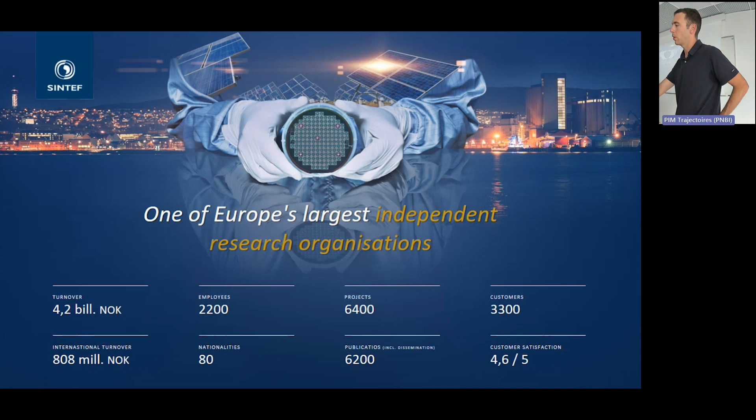The kind of very distinct aspect of SINTEF is that we work very closely both with university and with industry, in particular with NTNU, who was introduced by Erin just before us. SINTEF was actually created as a kind of spin-off or valorization company from NTNU.

Most of our employees are researchers, and most of them again have a PhD. Then we have some management and also a lot of technical personnel, because we operate quite a large amount of laboratories in very different fields - technical personnel and engineers.

Interestingly, though we're a private company, we have to really win our projects on the open market. It's not very much that we get as funding from the state every year - it's about 8%, which varies from year to year according to how much we publish, how many employees we have, and so on. So basically it's a lot of competition, both at the national level and international level, towards research projects like EU projects, national research projects, and also commercial project consulting.

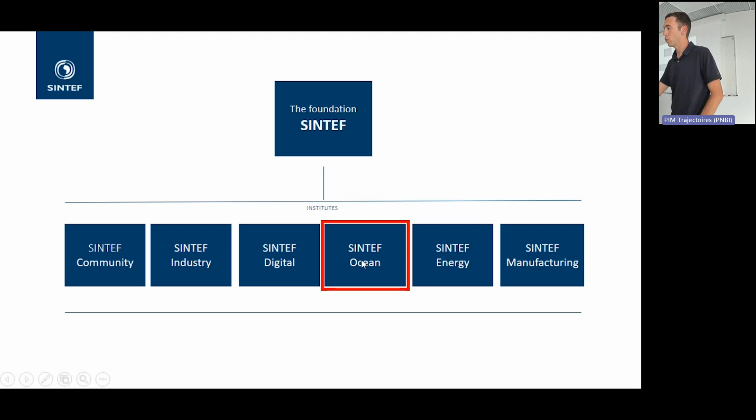I'm working for SINTEF Ocean, which can be broken into different departments. It results from the fusion about 10 years ago of different institutes in SINTEF.

What was a bit new at that time was that we merged the heavily technological part, where we looked at marine structures, hydrodynamics, and so on, with the biology world - aquaculture, fisheries, climate, environment, modeling of environment - things which are quite close to what FEM is doing actually. And we serve different markets connected to these topics.

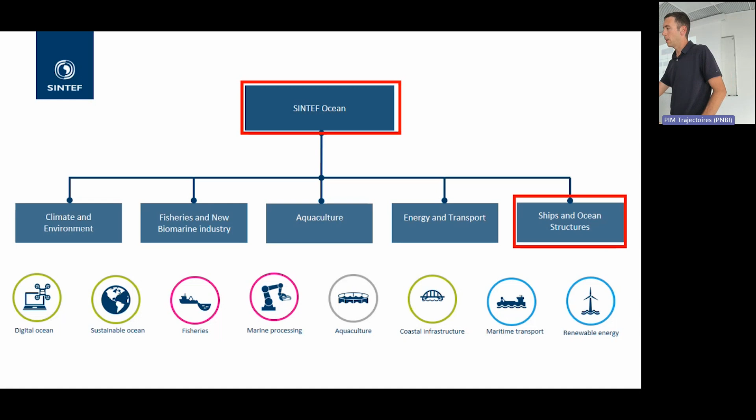I'm working in the ship and ocean structures department, and what we are proud about is that we operate laboratories which are among the biggest in the world in this class. We have software development, and we also do measurement of full scale on ships and so on. We also do services and studies for the industry, so we are very connected in many ways to the problems we are addressing.

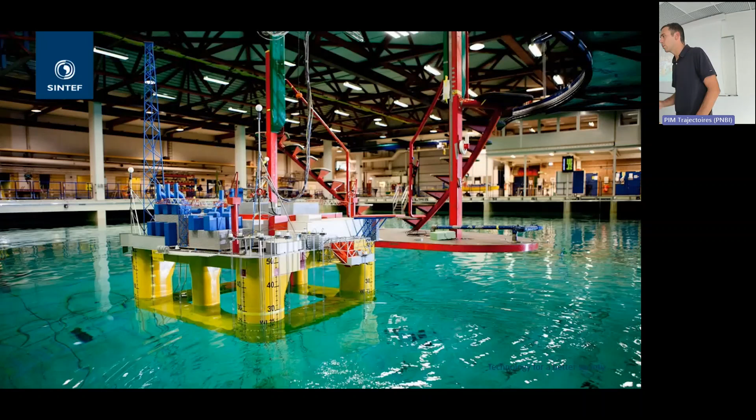The biggest lab we have as of today is the ocean basin. Some of you may have visited it - it's a basin which is 80 meters by 50 meters. It's quite large, and it can go from basically 0 to 10 meters water depth. You can generate waves from different directions, current, and so on.

This was built in about 1980 to serve the shipping market, to be able to do maneuvering tests, not only in a straight line as with the towing tank before - very long but not wide. Here we could do maneuvering tests, but also serve the oil and gas industry, which is extremely important in Norway, which exploded in the 70s approximately. So in the 80s this basin was built, and as Erin mentioned, the new one is on its way. Beyond that, we have the towing tank, cavitation tunnel to look at propellers, and actually many other things.

Also a laboratory where we look at oil, typically for modeling oil spills and how they could propagate. We have a lot towards the fishery and aquaculture, typically robots that can process the fish automatically, and we do research on that.

We have a full-scale aquaculture site, so it means that we actually produce salmon at SINTEF because we have a research site which was allocated by the state to SINTEF, and the idea is to do research on real fish farms. On top of that, we have a plankton center and a quite large structural lab where we test typically flexible risers or power cables and so on, with mechanical tests with pressure, bending, and combined load patterns.

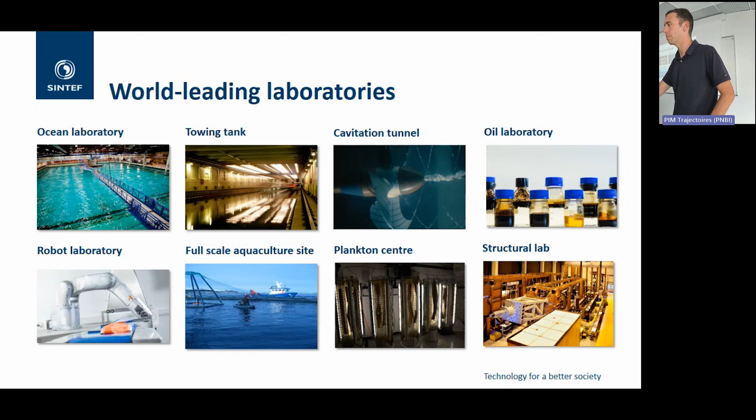So it's a very heavy laboratory infrastructure, which has its cost, and that explains that you have to put the money back into the system because you have to maintain and develop them. So just now we finished to zoom in.

I can introduce myself. I'm French, as you probably have detected from my accent, and studied in Lyon. Then I went to NTNU in Norway and got my master's thesis, and a lot later my PhD in cybernetics, marine cybernetics. I've been working basically for SINTEF Ocean since the start, with some different activities on the way, mostly research, but also management, strategy, and acquisition of projects and so on.

Since 2021, I have an adjunct position as a colleague of Erin at NTNU in the Marine Cybernetics Group, and it's mostly teaching and supervision. I'm happy to also be a member of STC in FEM since 2023, so last year.

So going back to this topic, which was cyber-physical testing. If we start with the basics, why do we need these hydrodynamic labs? The reason for that is basically three types of reasons, which are very different.

Let's say that once you have produced an FPSO, like this first ship, or you are going to invest in a floating wind park with budgets which are of the order of billions, it's one more step to check that the design is working as it should. So in principle, it should be routine. It should be no surprises. Sometimes it's not the case.

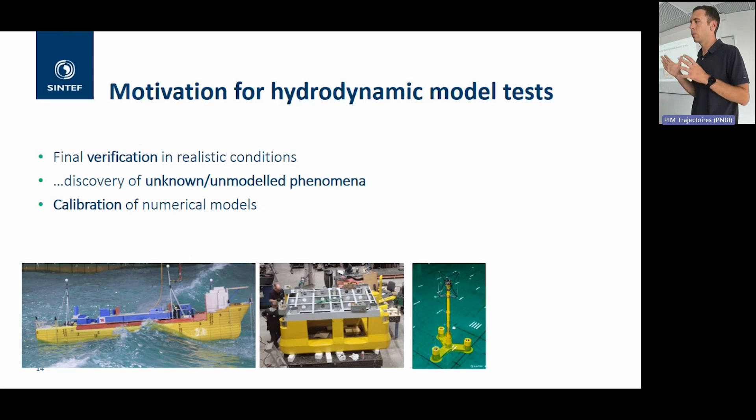And that's one of the steps towards getting good numerical models. If you want to trust the numerical models that you are going to use in the design or in your description of reality, you need to have at some point experiments, something which connects you to reality. The best, of course, is to have measurements out at sea. The problem with that is it's expensive, inconvenient, because it's difficult to repeat. You can just not spool back and try again. And that's why we have these basins.

So we do tests basically for these three reasons: quite routine tests for checking that this investment is safe, discovering stuff unplanned, and calibrating numerical models.

So what we measure in these models that you see - you have this FPSO, you have a semi here, or a floating wind turbine - we measure typically motions with sensors which are optical, accelerations with accelerometers, and if we have a mooring system, we can measure line tensions, internal loads in the tower, these type of things. A lot of instrumentation that you can have. For slamming, we have typically either pressure cells or panels, which are a bit bigger.

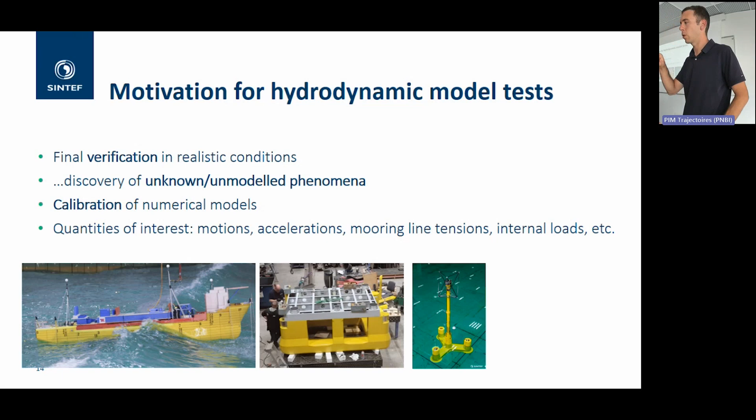So we did the test of Hywind Demo, which was the first floating wind turbine. I think it was installed in 2009 offshore Karmøy in Norway, and in 2005 we did the test for this. As you saw, it was made with fans, exactly the same fans that we use for offshore oil and gas tests. So basically they generate physical wind, and we saw that we had some trouble matching the thrust of this turbine.

So we added some winches that were pulling and so on. But basically that was what we could call the first test of a floating wind turbine, the first way of testing floating wind turbines.

As we have seen from the two previous presentations, which we are very happy to have had such good introductions to the topic, it shows that floating wind turbines are extremely complex systems. We have the wind part, but also the response part from the structure. And when you get into the lab, you need to try to replicate this system as well as possible to see if something happens that was not planned by the numerical model.

The issue is that when you produce wind like this, it's very difficult to repeat exactly the same wind twice. Even if you use exactly the same time series of voltage as an input, if you measure the wind at the location of the turbine, it will never be exactly the same twice in a row. Many have tried to improve that, and considerable improvements have been made, but it's still very difficult to get a good wind field over a large distance that is good for floating wind turbines in a hydrodynamic lab. In a wind tunnel it's a totally different story, but in an open laboratory like that, it's not that easy.

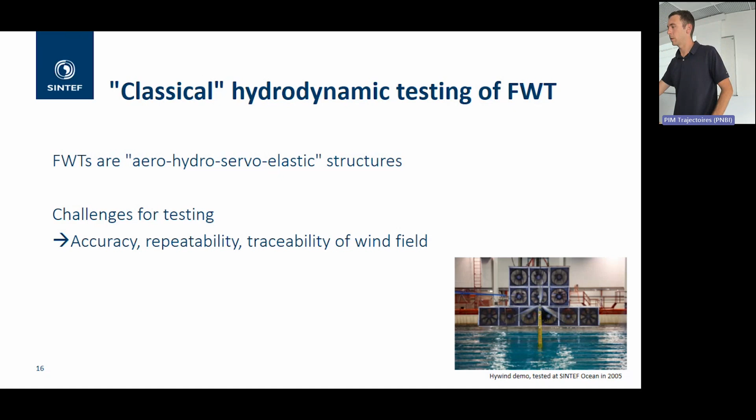The difficulty you also have is when you need to scale down things. In hydrodynamics we use Froude scaling, which gives us how we should scale down all the parameters of our model. Mass has to be scaled down by the cube of the geometric scale, which means we need to be extremely light, and modeling the nacelle and the blades and so on with this mass is complicated. We have also an issue, which is that even if we get the perfect wind and a perfect mass distribution, we'll still have a very wrong Reynolds number.

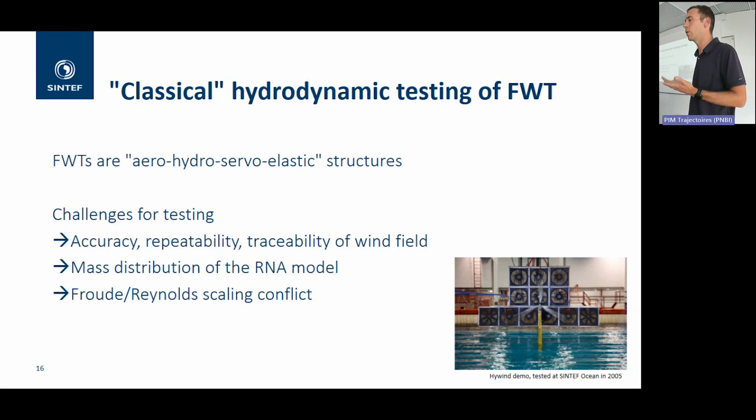So the Froude number is non-negotiable because we have waves, so this one we have to keep. But at the same time, if we do that, we don't have the right Reynolds number, which means that these blades will not work as intended.

So long story short, that's why we developed this method, which is actually based on OpenFAST, where we couple in real time what OpenFAST tells us is the rotor loads with what we measure in the lab. The rotor loads computed by OpenFAST are fed into the lab using what I'll come back to, which is a robot. We measure the motions, we send them to OpenFAST, which computes the rotor loads, and that goes as a closed loop system.

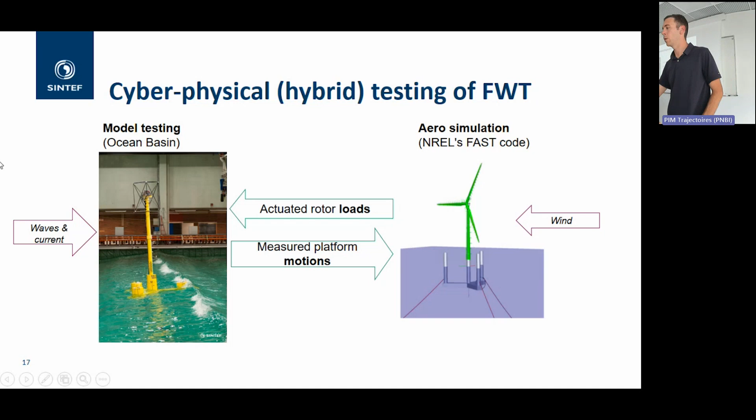So the wind is virtual, numerical, while the waves and currents are physical. It looks like that in reality.

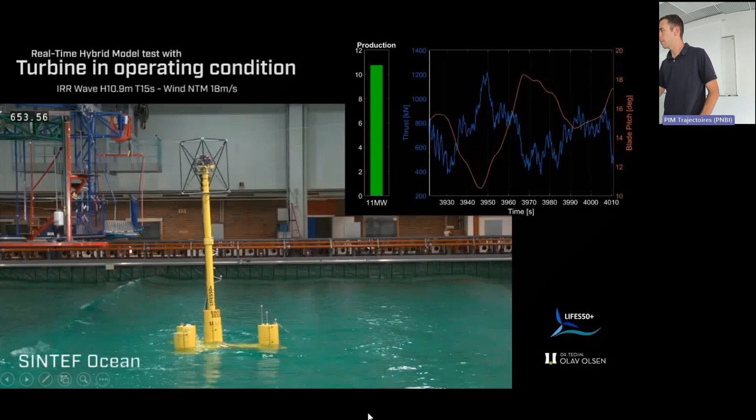This is a test we did for a 10 megawatt wind turbine some years ago, where you see basically how things go, and here we have a cable robot which applies these loads dynamically while the simulation runs. You don't see it in this previous video, but there are 6 winches located completely far away from the model, each pulling on the model in the basin, so that the total load applied on the model corresponds to the one that OpenFAST predicts.

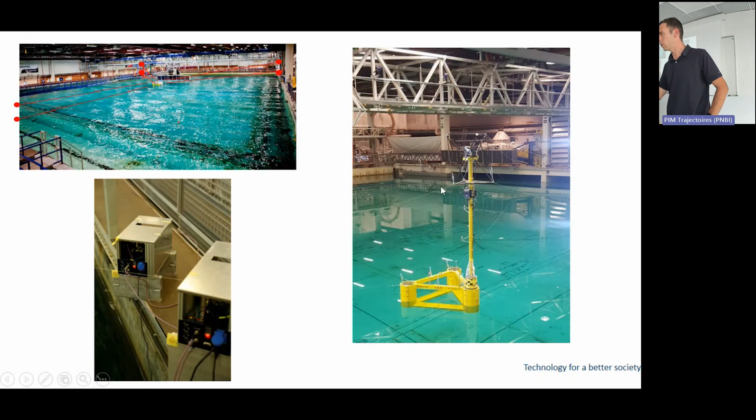These winches look like that, and they're connected with small wires to the carbon fiber frame here.

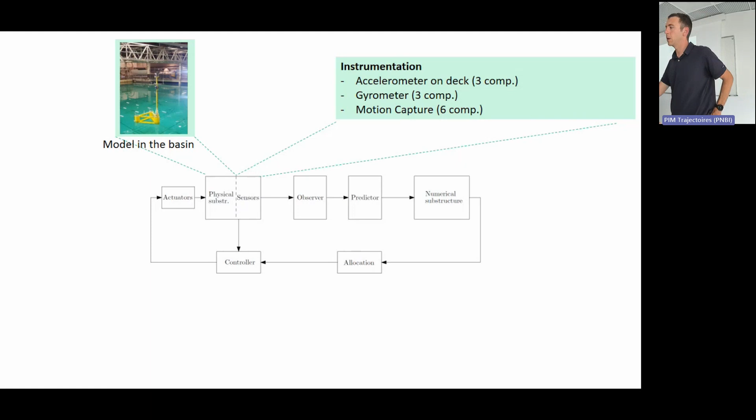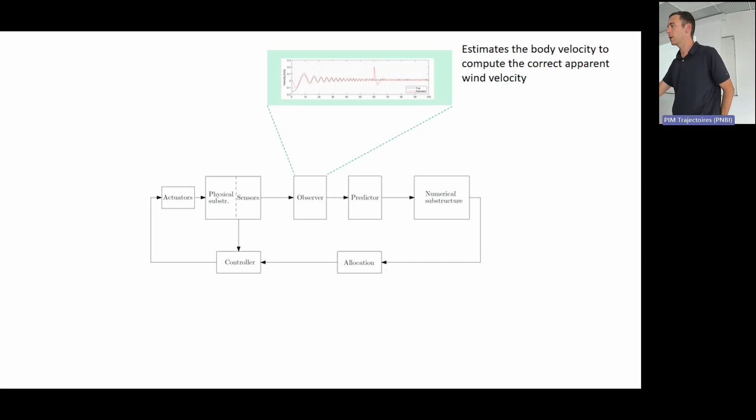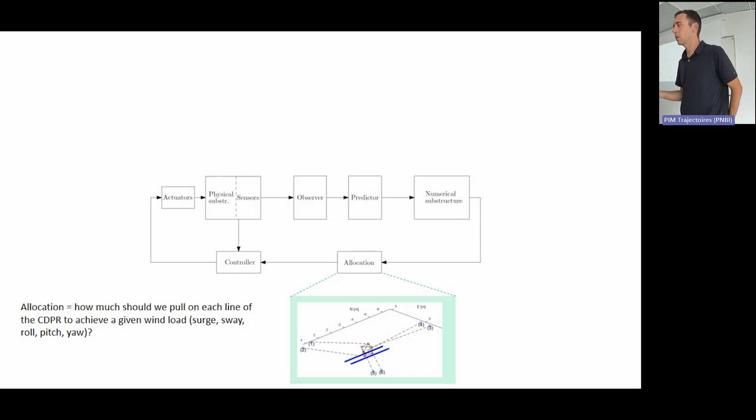I won't go into great detail on the setup, but it's basically a closed loop system, and you have sensors, you have observers that give you access to data that you don't have access to with the sensors. OpenFAST would be here, and then we have an allocation problem, which means you compute how much you should pull on each cable, and you do that with each winch, and basically you are there.

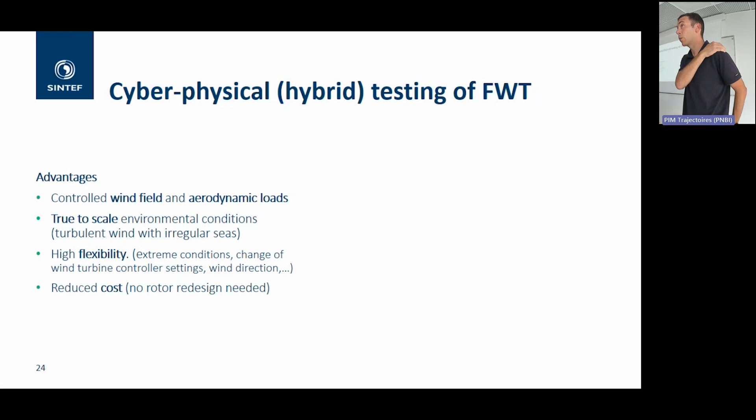So the advantage of this method, which we developed about 10 or 11 years ago, is that the wind field is at least controlled. We could repeat it because it's simply a simulation, and the aerodynamic loads can also be repeatable. So we can focus on what we are actually looking at, which is hydrodynamics, not aerodynamics. We've done as good as we could with the aerodynamic part, but we can now focus on the hydrodynamics. We have solved this scaling issue, which we had with the physical rotors.

It's extremely simple to test very complicated scenarios that some standards ask you to check, like change of direction, large gusts, and so on, which would be difficult with the physical wind. If you don't use this method, you need to redesign the model scale rotor to match the loads better, but first you need to redesign the rotor and the controller that works with it, so it's quite a lot of work.

With this method, you simply use the simulation model for the rotor that you have. The challenge is that you need to trust your numerical model, and as we saw, there is still a lot to do on that front, which is very interesting. The numerical model also has to be fast, because Froude scaling tells us you need to run at the square root of the scale faster than real time.

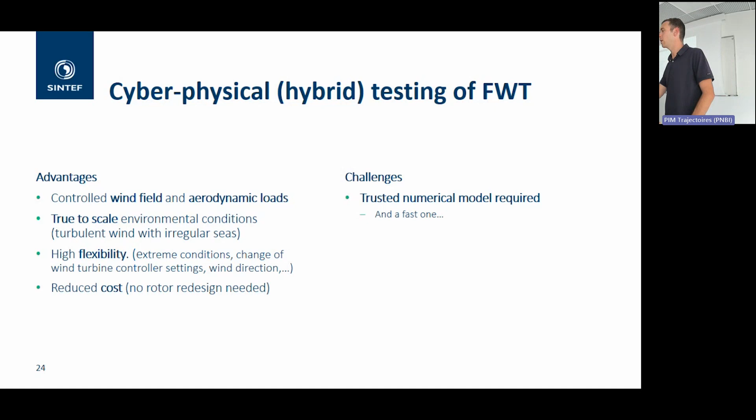So if you are testing a scale of 1 to 36, you have to simulate 6 times faster than real time to keep up with the Froude scale in the lab. So that's an efficiency constraint in the numerical model.

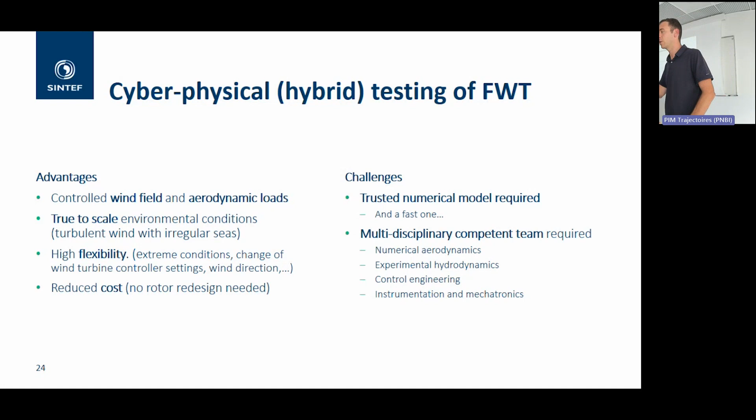And there is something not scientific at all, but as a company you really need to maintain a team of people that has competence in very different topics. They need to stick together and work together, because you can't do anything without the OpenFAST model. And knowing the bits and pieces of this model, you need people who are good in experimental hydrodynamics, people good in control engineering and instrumentation, and so on. So you need to have a very good team.

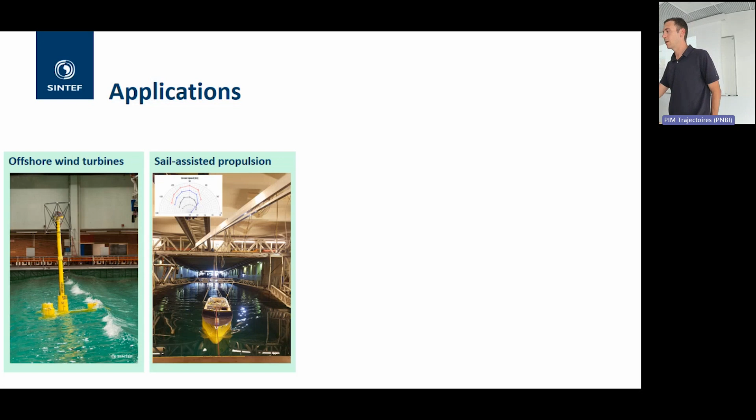So I mentioned offshore wind turbines for this technology, but we also use it for sail-assisted propulsion, which is a very hot topic right now, because a share of greenhouse gas emissions comes from shipping, and they are trying really hard to put sails back on ships to reduce that. It's very efficient. It's not greenwashing - it's something that was proven to work up until the 18th century, and it's coming back.

We can use that for station keeping, so use the same type of positioning system or active system to do station keeping of the floater. I'll come back to that. And we can also use it simply to apply wind loads, but on structures which are not floating wind turbines.

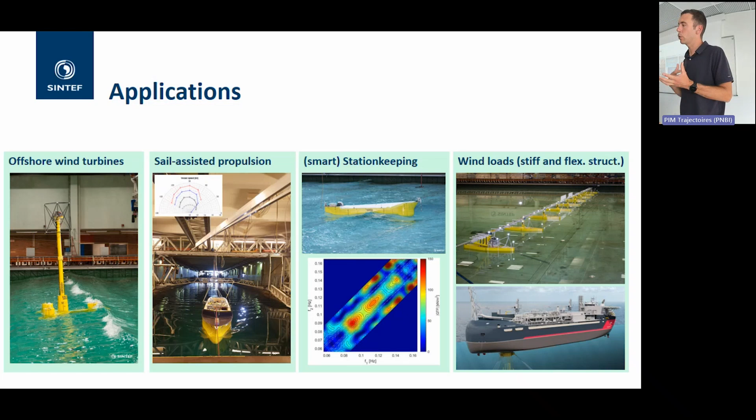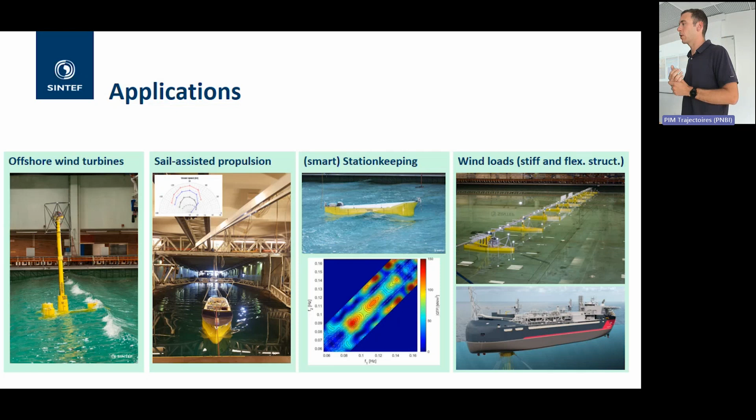For example, we are looking at floating bridges, and floating bridges are extremely long, so when we put them in the basin they cover the whole basin. Generating wind across the whole basin is quite challenging, so we use this type of system to simulate wind loads on floating bridges.

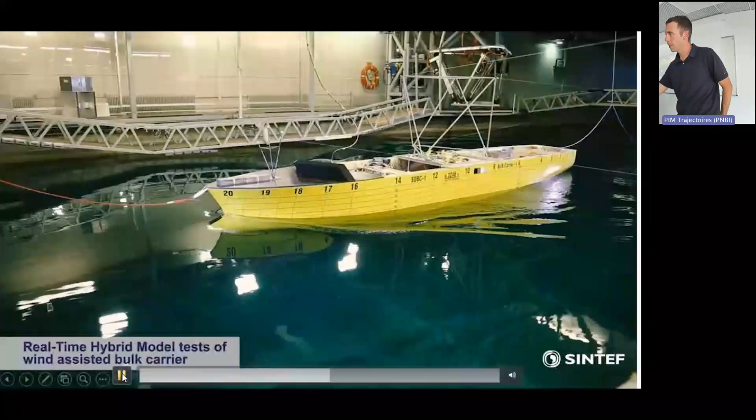This is a small video of the sail-assisted propulsion tests. So you don't see the sails, but they are there virtually. There are 4 Flettner rotors - if some of you know about this technology, it's a rotating cylinder - and they are mounted on a bulk carrier. The bulk carrier is quite good because they have a lot of deck space where you can put sails, which is free.

We have tested this ship, and we are working with many partners now to further develop both the method and the sails and the sail models.

Oops, sorry, I think I might have destroyed this sharing. Let's see... yeah, I'm back.

Sorry for that. Just to conclude a bit, what I've shown here was simply connecting numerical models with experiments in real time and with a control system. We did that for what we call substructuring, meaning we had a system which was a bit complex, so we just put a line somewhere and say this is numerical, this is physical.

What we are working on now is using this type of technology for learning much more about the hydrodynamic systems we have, by changing the boundary conditions that they are experiencing. So imagine you are testing this FPSO, this ship. You want to see what forces depend on the response - typically damping or added mass - and what forces don't depend on the response.

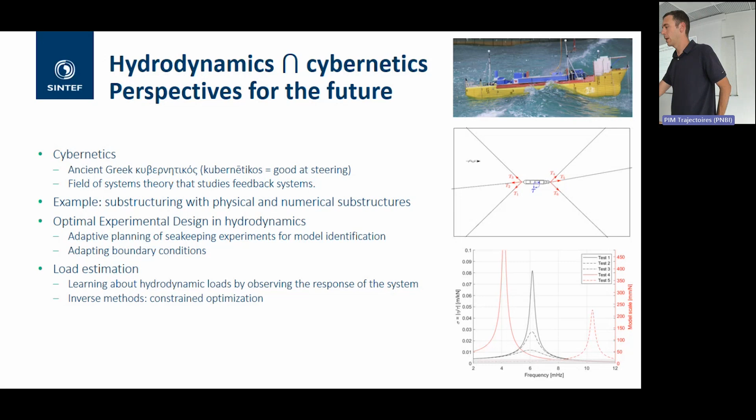Last project, which is even funnier, was completed a couple of months ago, where we worked with the Hywind Scotland 3, one of the turbines operated by Equinor, where we applied methods in cybernetics to detect faults in the measurements of line tensions on this turbine, HS3.

Based on that, the idea is to go to sensor-less mooring line tension estimation. The holy grail is to be able to estimate the tension in the system without any measurement, because a measurement can fail, it can be biased - it was heavily biased here, for example. You try to not install it, not maintain it, and not dismantle it, and so on.

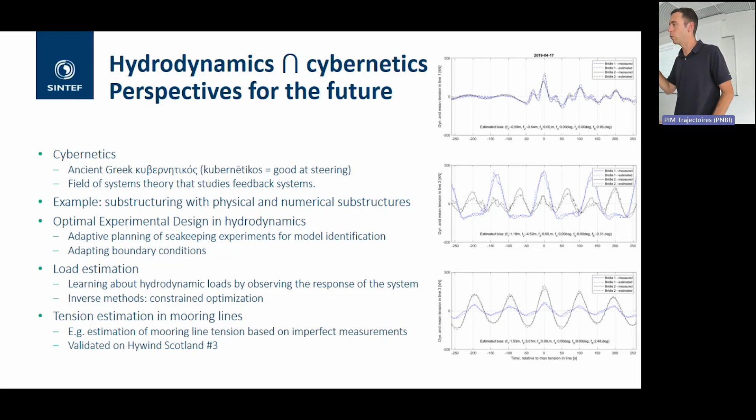GPS has to be there for many reasons, so why not just use GPS? Bottom line, it doesn't work using only GPS for this case, but by smartly fusing the different sensors on board, we could manage to estimate the tensions and remove biases from sensors and so on.

Very clear presentation. So, yeah, yes.

We were a bit far away from the experiment, so we couldn't make much of it. Have you - I mean it's been a few years now - have you, I mean it wasn't at the same time, but have you been gathering more experience now in filtering those? So the noise, you mean the noise was not - is it like wind loads which were noisy, or was it?